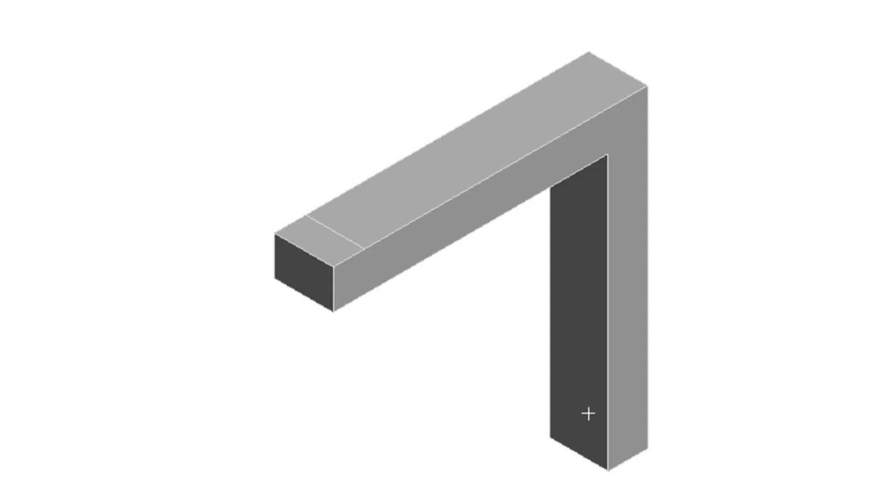This is a right angle, and this is a ribbed right angle. By the end of this video, I'm going to show you how to model, mesh, and set up the simulation in order to solve them for stress, strain, and deformation for both of these right angles. At the end of the video, I will also reveal a special feature as to why these ribs are actually used.

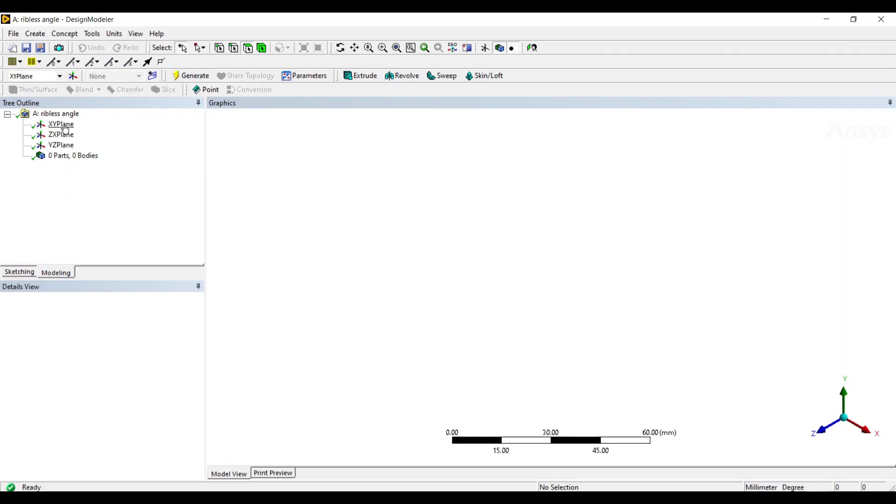I'm going to select the units as millimeter, and in the XY plane, I'm going to draw the rectangle which is going to be fixed support. These angles are usually used in case of shelves or racks, and hence one face is always attached. The horizontal length is going to be 15 millimeters, and the vertical height will be 80 millimeters.

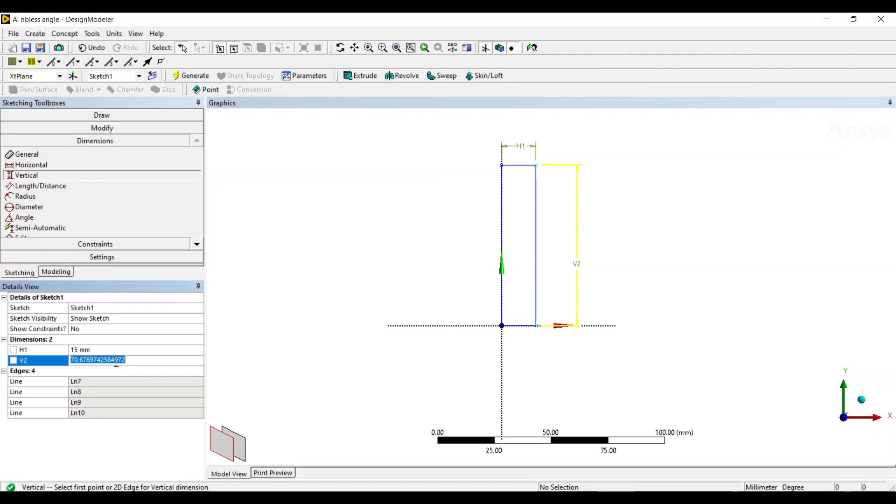I'm going to extrude this for 10 millimeters. Make sure that the operation is at add material. The direction is going to be normal and outwards, and click generate.

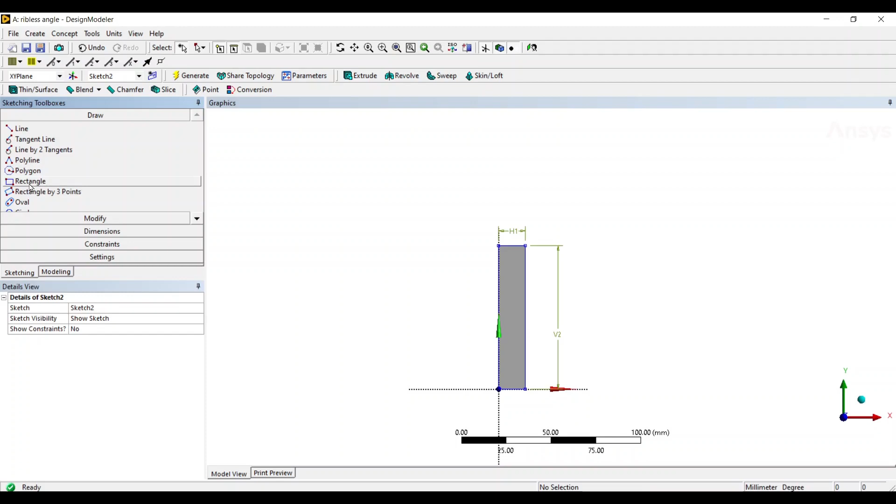In order to create the second face or the right angle, I am going to reselect the XY plane and draw a rectangle on the face itself. The thickness of both the plates is going to be 10 millimeters. This is going to be 10 millimeters. Extrude it for 80 millimeter length and click generate.

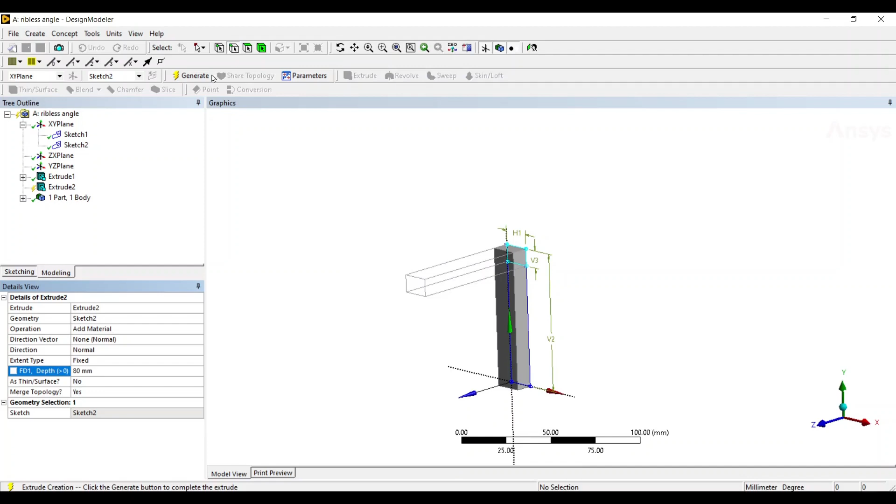As both the operations were at add material, both the extrudes are fused to form a single body, which can also be seen in the left hand side in parts and bodies, which is showing only one.

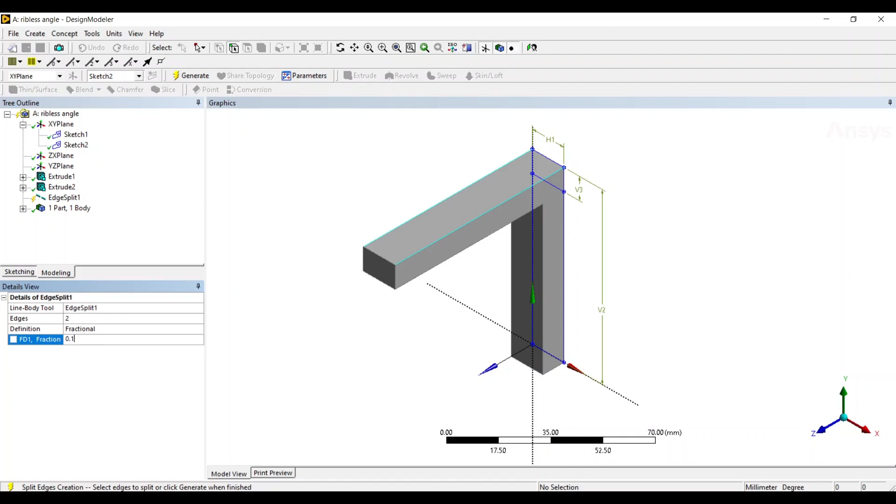In order to apply the load, I am going to face split the upper face. To do this, I have selected both the edges and created a split edge. Select the face split tool and generate. This has created two different faces.

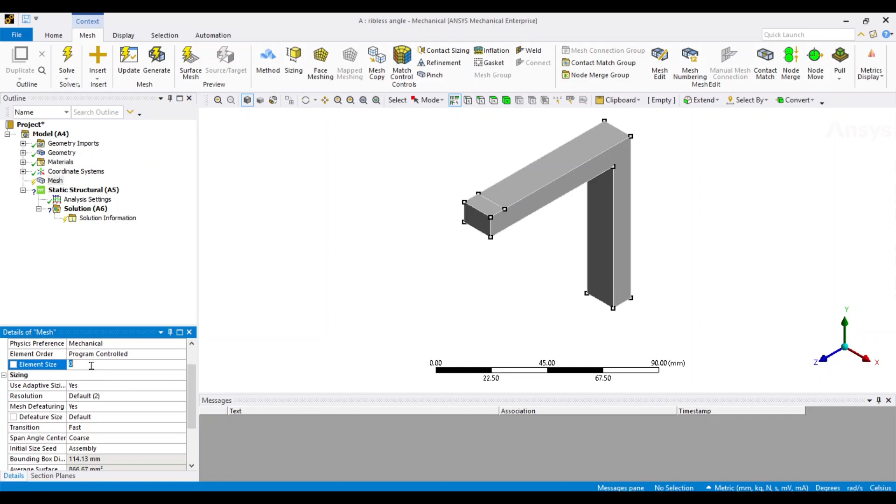Within the setup, we first need to mesh this body. I'm going to give a coarse mesh, say of 10 millimeters, just to see how it is meshing. It's a coarse mesh, and we need accurate answers that are dependent on the fineness of the mesh.

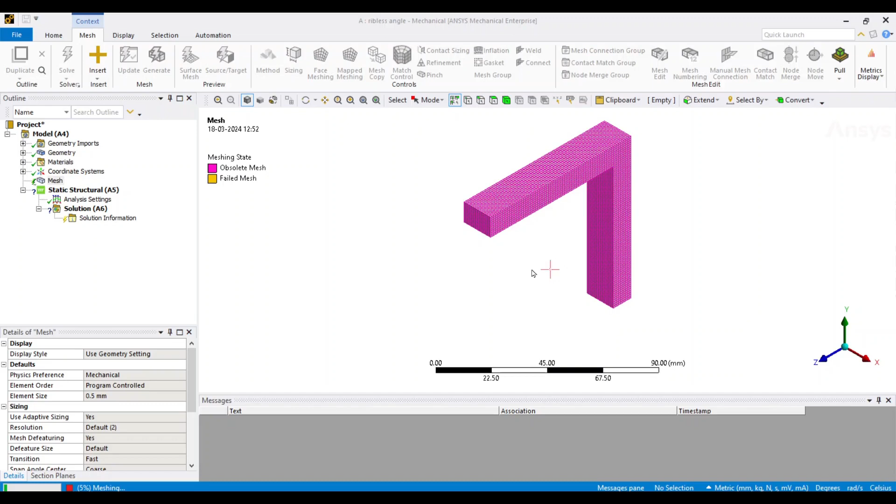This is quite a fine mesh.

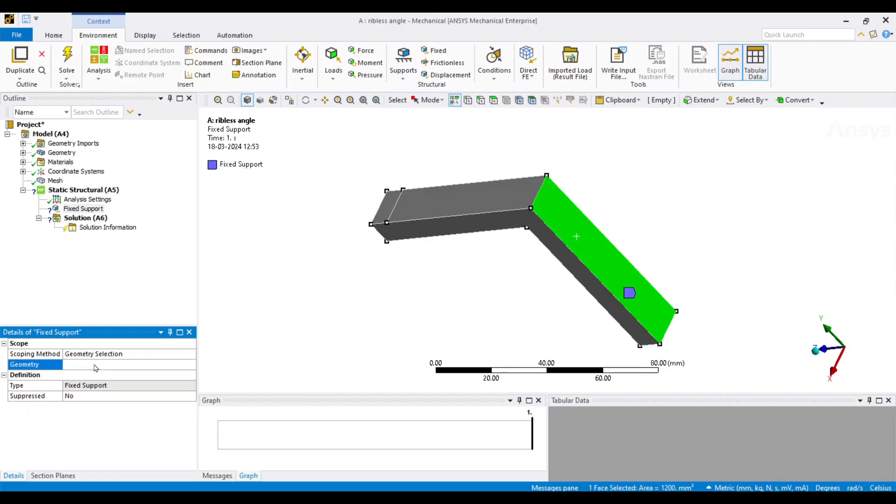I'm going to give the fixed support to the back face, which is going to be attached to any wall or any surface. I'm going to give a downward acting force on this split face. Let the force value be 100 newtons, which is equivalent to almost 10 kgs of weight. Now this is showing an upward direction. We need it downward, so change the direction.

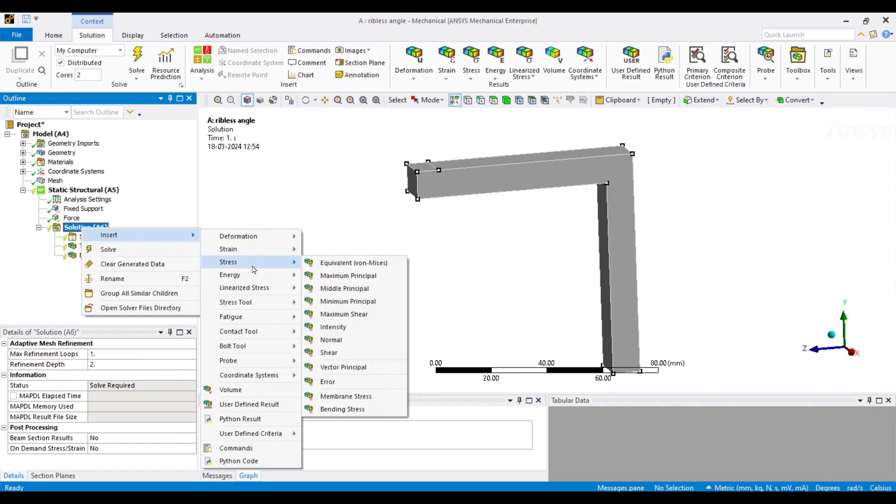I'm interested in deformation, the strain, and the stress. This completes our setup. Now just click on solution and click solve. The solution is completed, and we can see that the deformation has occurred.

The deformation causes the overhang to bend downwards.

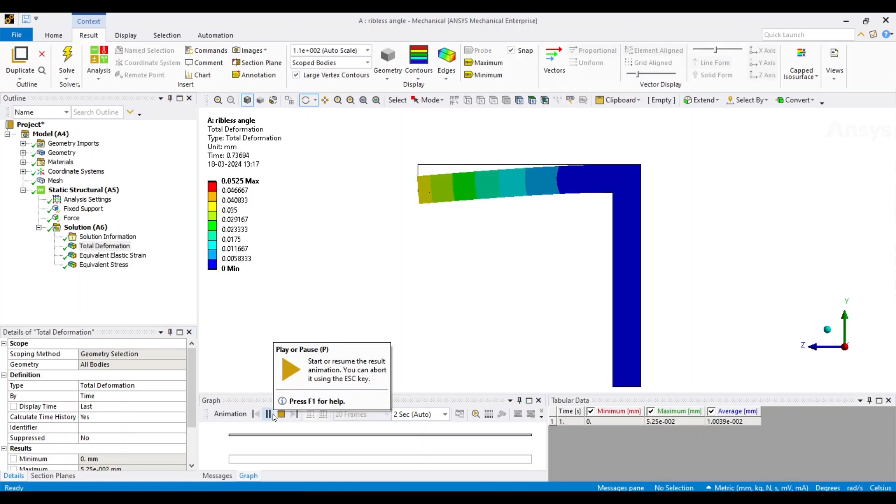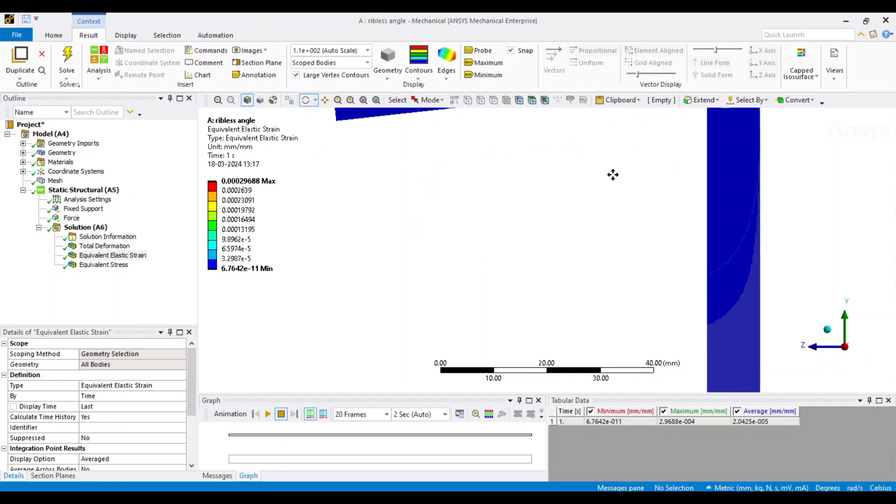In the strain, we can see that the strain is mostly concentrated on the upper and lower surfaces. This is due to the fact that the upper surface undergoes extension and the lower one undergoes compression. More strain is concentrated at the point of the right angle.

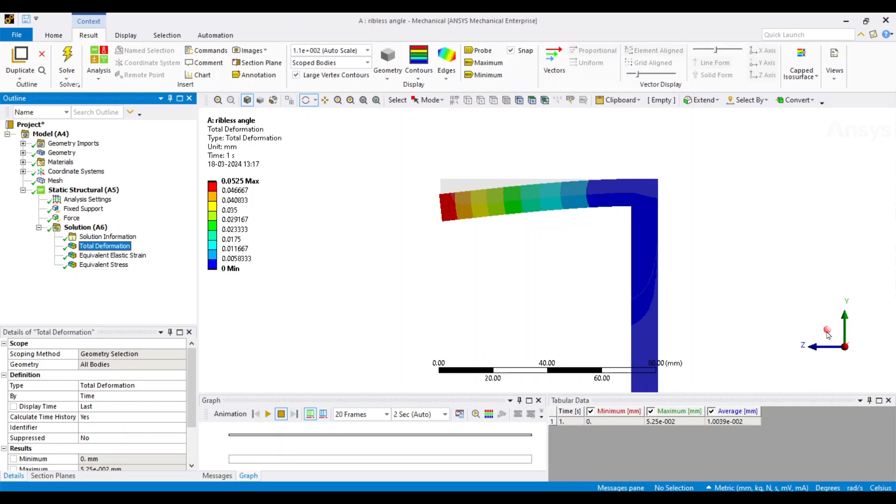Stress and strain are usually the same, and hence where there is strain, there will be higher stress. The deformation I can see is 0.05 millimeters in the downward direction.

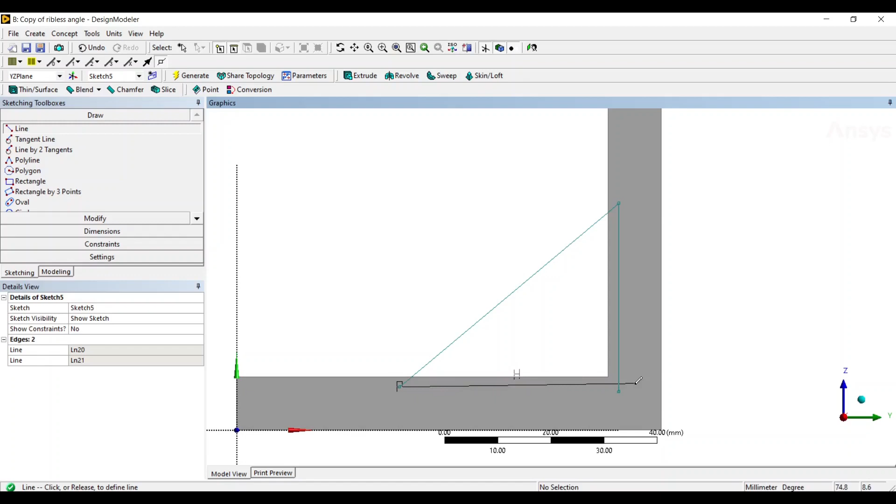Now let us move on to the ribbed case. I am going to create a rib for the support. Draw the triangular rib profile. I am drawing it slightly inside the existing profile, as when I extrude it, it will merge with the existing one and form a single body.

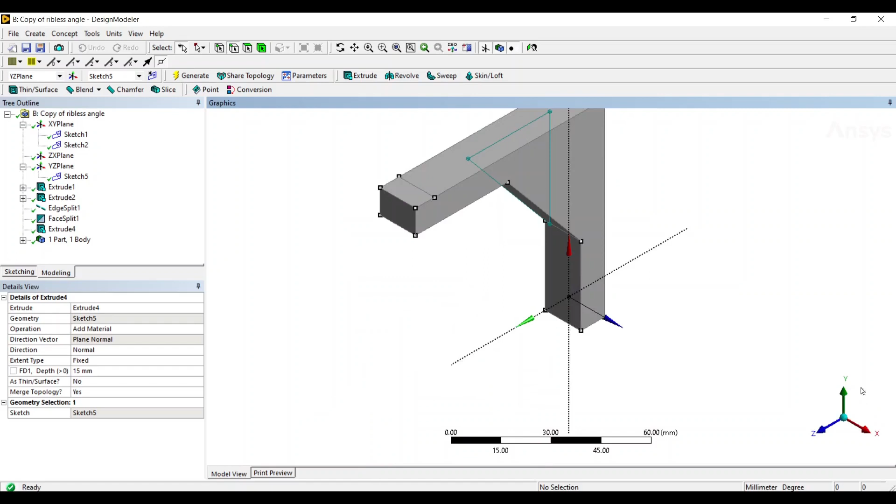Extrude it for the thickness of 15 millimeters. And we can see that it has formed a single body by merging with the existing right angle.

I have meshed it just like the previous one at 0.5 millimeters. The boundary conditions are going to be the same, as the back face is going to be fixed support and a downward acting force on this split face of 100 newtons.

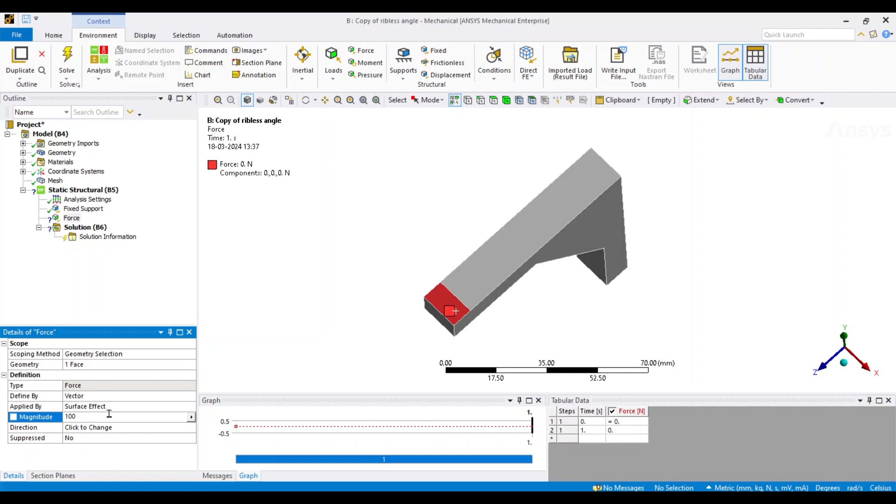Change the direction again to downwards. Deformation, strain and stress, and solve.

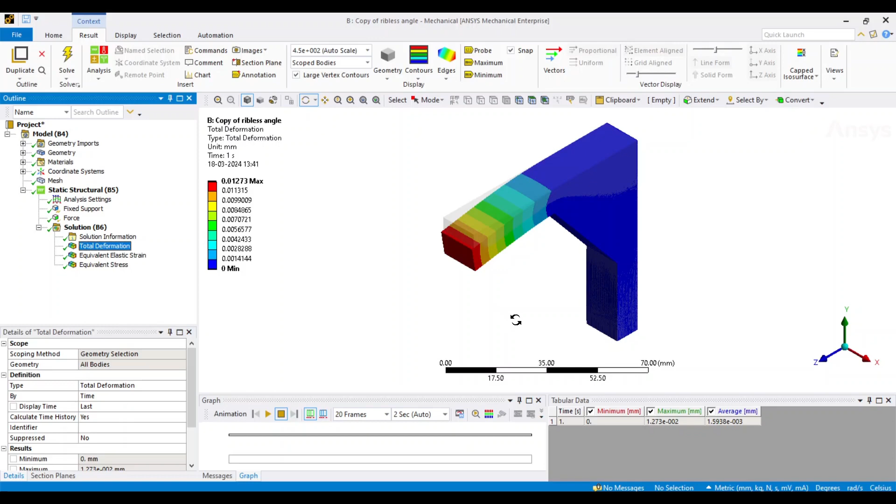From the deformation, we can see that the deformation has decreased from 0.05 millimeters for a simple angle to 0.01 in the ribbed case.

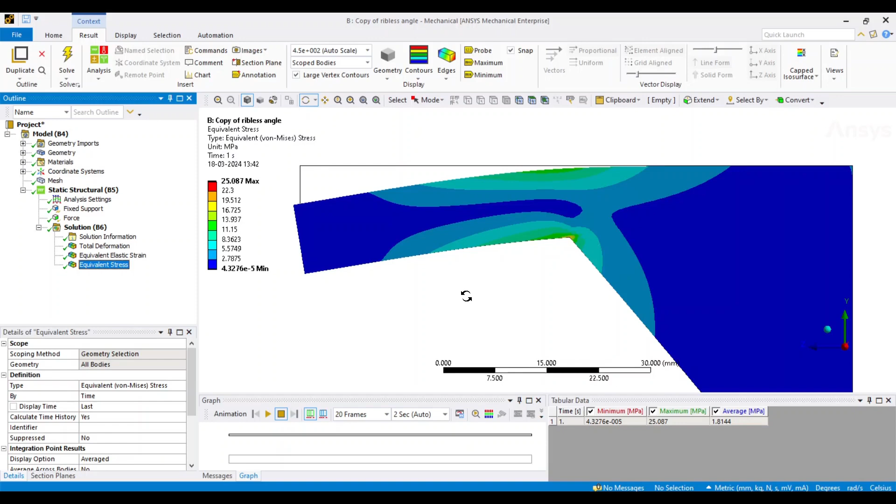And this is the property, or this is the feature of ribs. Right angles tend to concentrate stress and strain where they are present, and hence they are avoided, and hence fillets and chamfers are given anywhere where they are necessary.